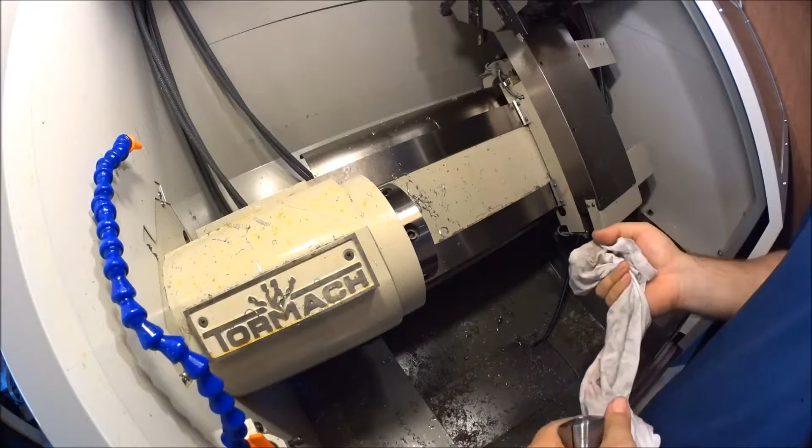Okay, so we're about ready to put the new collet in, but before I put the new collet in, I always take a rag and wipe out the seat, just so that if there's any chips or any kind of debris, it doesn't affect the accuracy or wear out unevenly. So just make sure that's clean, and make sure the collet's clean. Just slide this in, and we can just feel around. There's a pin that goes into this groove that keeps the alignment. So we just want to feel around until that pin slides into there.

And then on the back side we can screw that draw tube into the collet by rotating the opposite way. Sometimes it's a little bit tricky, it might not want to go right away. There it goes. Give it a little bit of a push. Now I can just screw this down until we get kind of close. There's not a lot of movement, so we know we're getting close. Okay.

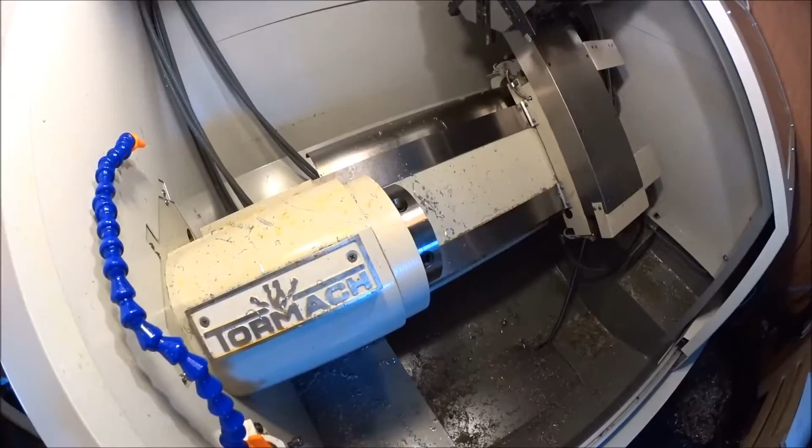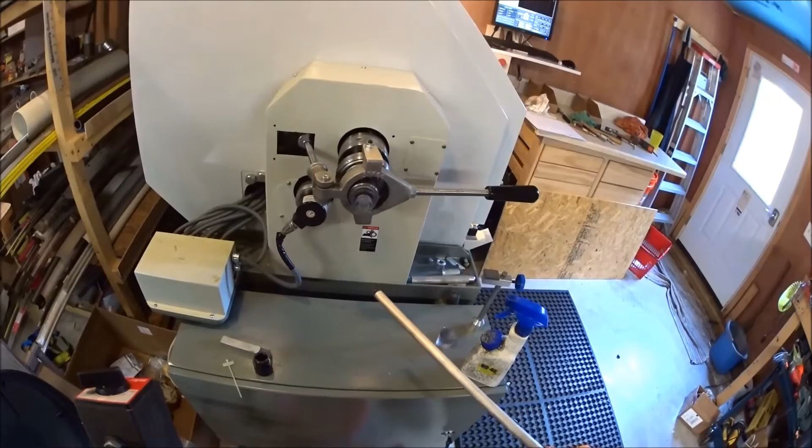Now I'm going to show you one of the little secrets that I found when I started. I found that when you put a rod this small into this machine and you start spinning it up, it has a tendency to whip really hard back and forth when it's a long bar. So I went ahead and made up one of these things here, and it's just like a bushing, so that it can plug into this draw tube and reduce the size of the hole that this thing can go through, and that will keep it from whipping back and forth too bad. That'll kind of keep it centered.

Once you get the part all the way in there, you can pretty much just take this out. It'll be too short at that point to whip enough to really be of any danger. So just pull this back out for a minute here. Set that down. Get this locked back in.

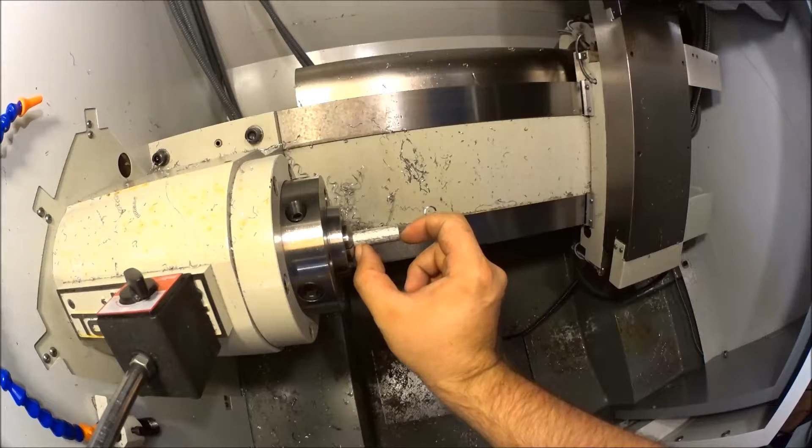Okay, so according to our drawing, this part is going to have a total length of 2 inches. So we want to make sure that this length is 2 inches plus some clearance room, so that whenever we go to cut it off, none of the tools will run into the chuck. So 2.5 inches sounds like a good place to start for me.

So I'll just take our handy little stop here, put it up against here, and slide it out until it touches, and that's going to be good enough. We'll actually give it a little bit more for this first one, so that we can face it off and set our length on all the tools that we're going to have to put in.

So I need to tighten this up a little bit until it locks properly. Give that a little bit more. Okay, so that's locked in good and tight there now. And we're ready to get on to setting up tools. So now I always up my jog speed to 100. I know where I'm going.

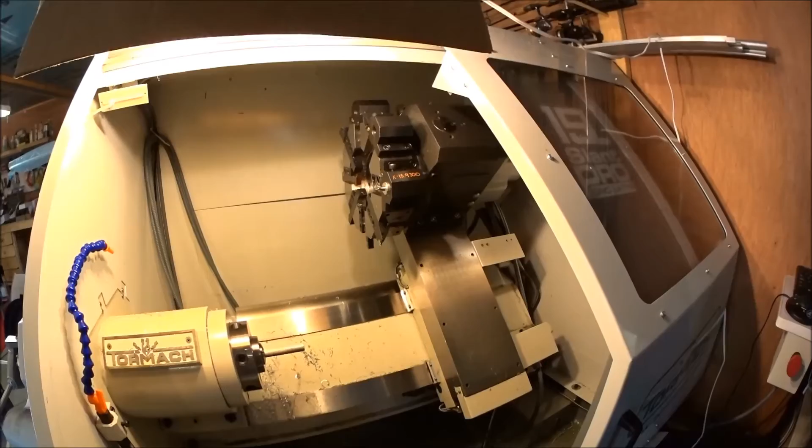So we're going to just come down here with tool number 5 that's selected right now. Let's change that to tool number 1. So we'll go T101. This is my master tool for length offsets and all that happy stuff. So we're going to come over here, come down, and we're just going to get kind of close for right now, and then we're going to input.

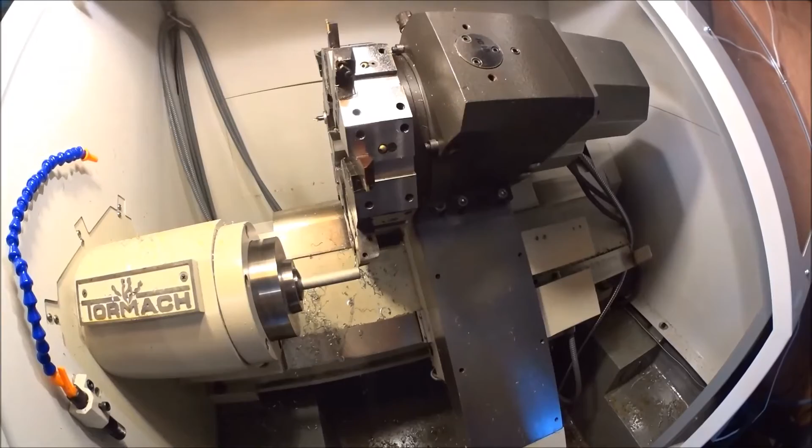Let's start out at 1000 RPM, hit enter, and we'll turn the spindle on. And now we're just going to move over until we kind of touch the end, and we can face it off a little bit. So you just want to take a couple thousandths so that we're cleaning up the end. And we just stop everything and tell it that this is our Z0.

Now, this was something that I learned the hard way. So the first thing I want to do after this is back off the end and go to my cutoff tool, which is going to be tool 202. I'll move to a safe X, and then I'm going to move until I'm at Z-2 and just give an eyeball check and make sure that everything's going to come out okay.

So that's close enough. And looking at everything, yeah, we're going to be fine. So that's a good Z0 for everything. So let's move back home. Alright, so that's the stock setup.

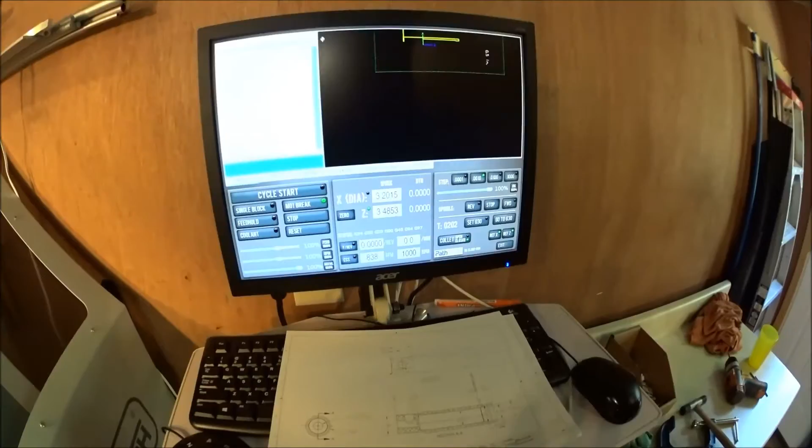Now, we still haven't programmed any kind of G-code yet, and this is going to be a multiple setup part. We don't have enough boring tools to make all the features on the inside, because what we're going to do is we're going to have to spot drill this. Then I'll probably drill it out with maybe a 1/4 inch drill with parabolic chip flutes.

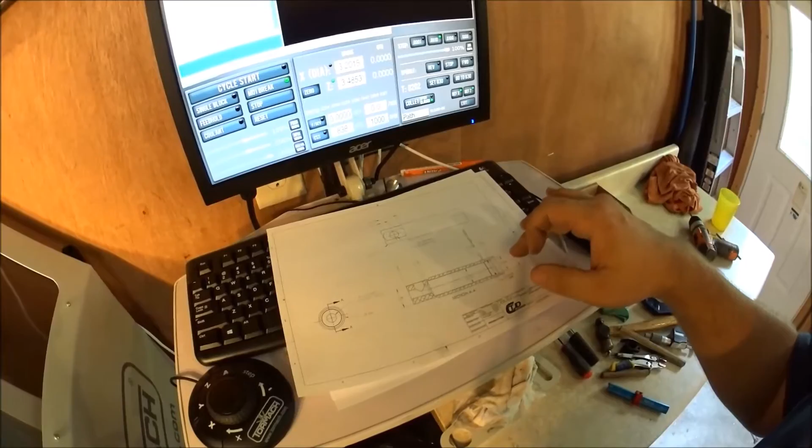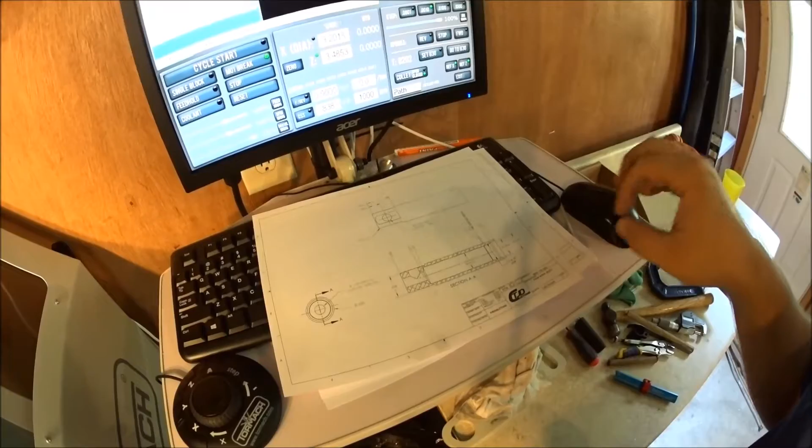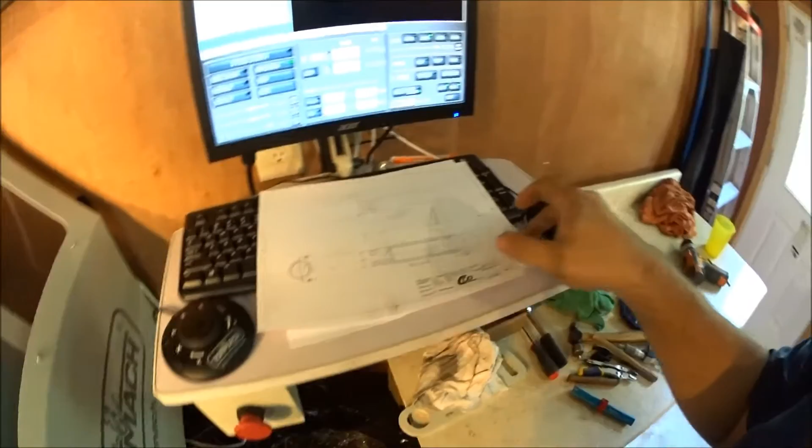Then the next thing we'll do is we'll take a smooth finish 3 flute carbide drill and drill it out to 3/8. But knowing what I know about the O-rings that I'm going to be putting in here, I'm going to want to ream this to a little bit above 3/8, to about 380. So we'll ream that out to 380, which I have a reamer for. But that's 3 boring tools, and let's jump over to tool 6. So T606.

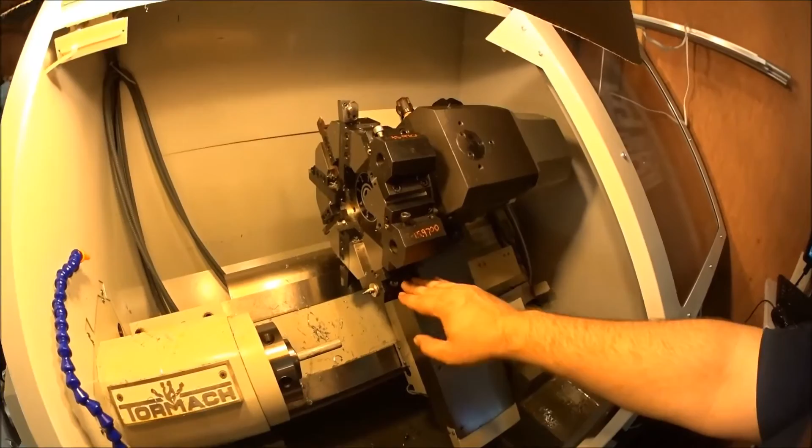So I only have a slot for 3 drilling or boring tools, and I'm not going to tear down the rest of these tools to do that. What I think I'm going to do is do the spot drill, rough drill, semi-finish drill operation on this setup, and turn the OD to 1/2 inch, and that'll be it for the first operation.

The second operation is where we'll do the reaming and the boring and the threading, because that'll be another set of 3 tools that I need. So with that in mind, we'll go ahead and get on writing the program to do that stuff.

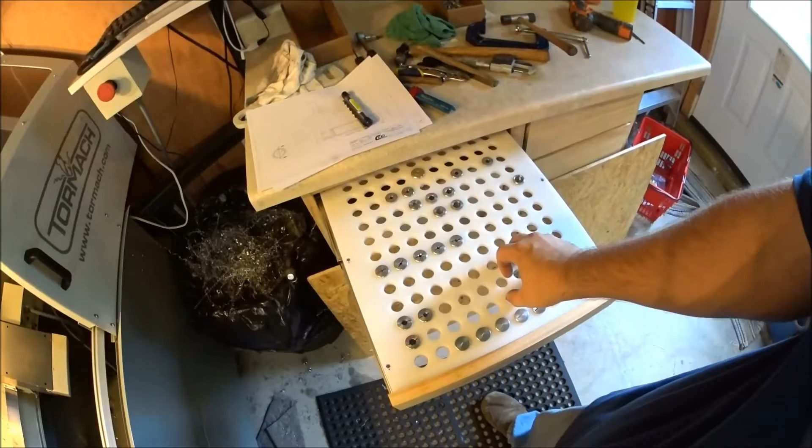Okay, so if you've seen a couple videos ago, I was talking about how I wanted to get this bench done. It's still not quite done, but it's done enough to start putting some of my tools in. So the short drawers here were specifically made to hold these drill bushings, and these are the blanks. This particular one is a blank to make things like this here.

And what these do is these go into the holes in the turret. These are 3/4 inch holes, and they are split so that whenever you clamp down on them with these pinch bolts, you clamp onto the tool and hold it concentric, and you can use it to drill. So it's a little bit more rigid than using a drill chuck, but not quite as versatile.

But I have plenty of these things here, and I don't want to have to use all the extra Z clearance. Whenever you put a drill chuck on here, your Z home position for your tool change would have to be a lot further back. So I want to save a little bit of time by not putting any kind of drill chuck on here and getting the tool as close to the same length as possible.

So okay, we got tool number 6 in. Tool number 6 is going to be our spotting drill, so that's already in there from the previous job. Tool number 7 is going to be our 1/4 inch drill. So we got that right here, and this is a parabolic drill, so that we don't have to worry as much about clearing chips. This can clear a lot of chips real good.

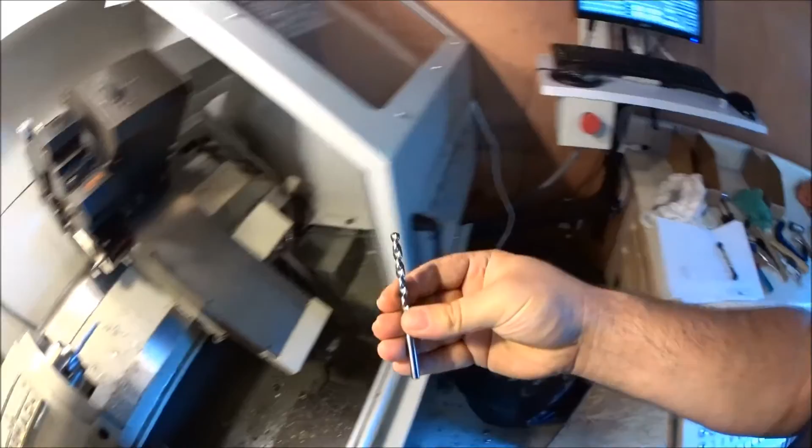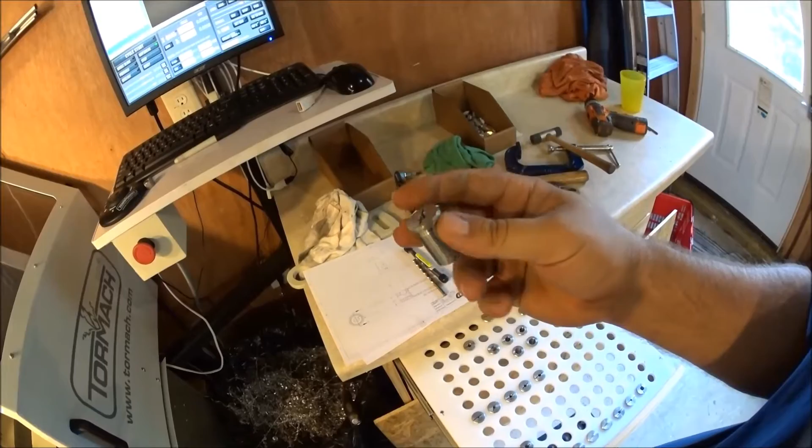So we need a 1/4 inch split collet here. These are the kind of collets that I actually make. This is one of the first programs that I made, and I actually like to split them this way as opposed to this way. This is a different style of splitting. I think that this holds them better because the point that you're trying to bend is further from the center.

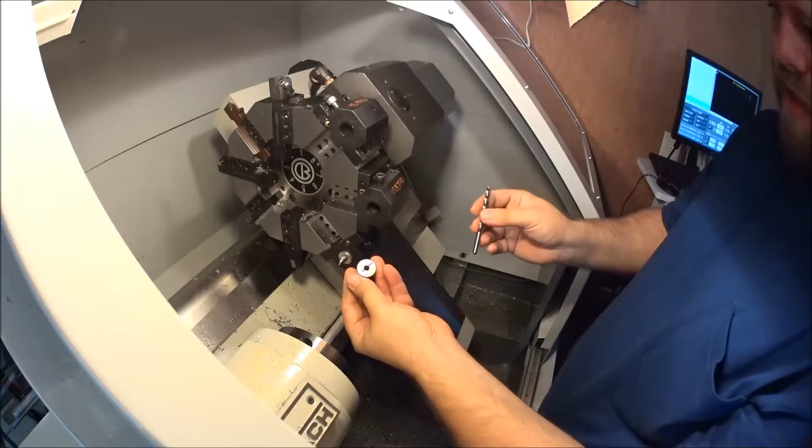Okay, so I'll put one of these things in, and we'll get started on that. So these are pretty easy to put in. You use the drill size that you want to have the hole be. Drill the hole so you know that it's going to be the right size. I don't bore these out or anything like that. I just use a drill, and slide that in there, and it registers up against the surface.

And then I lose my wrench. Oh, here it is. So make sure this is going to be tightening, and then I can just tighten this down. There it goes, and that's it. So that's nice and tight in the little split collet. And what I'm going to do now is move this back, go to tool 7.

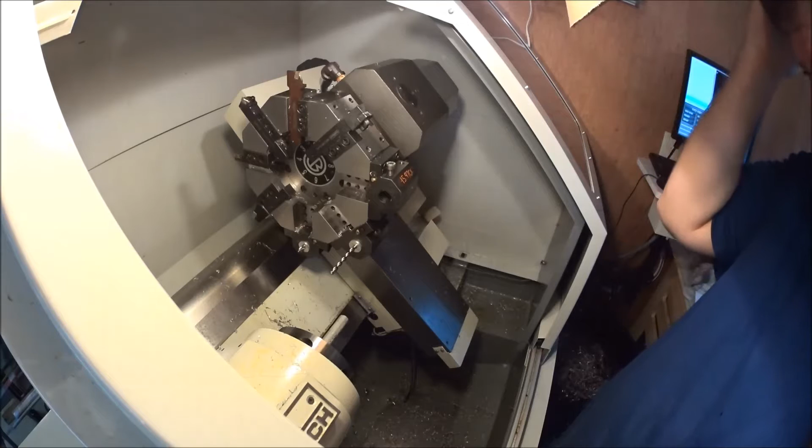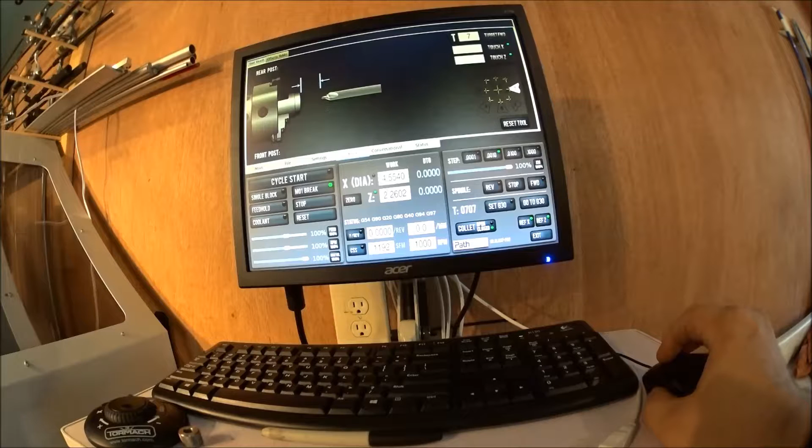You can probably see it's kind of a little bit washed out, but I know that the center of this hole was bored whenever it was at X minus 15.97 from the home position. I'm going to jump you over here to the computer and I can show you what's going on. Okay, so we got tool 7 selected over on the machine, and we want to make the offset for this thing here. It's already set to tool number 7, which is a drill. It's shown as a center drill, but it works for any drill.

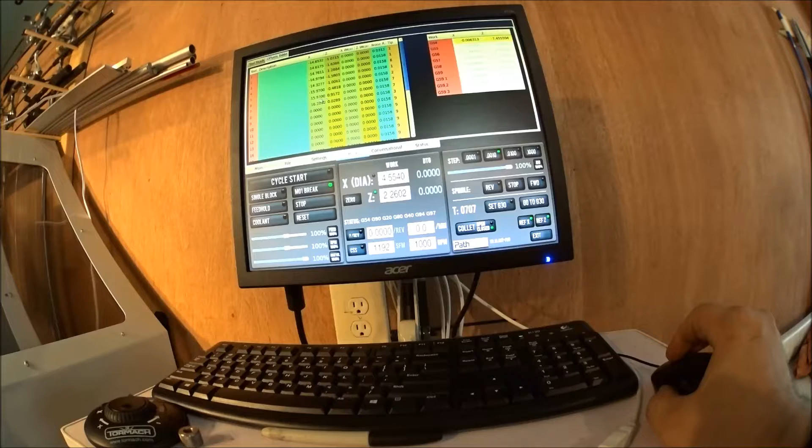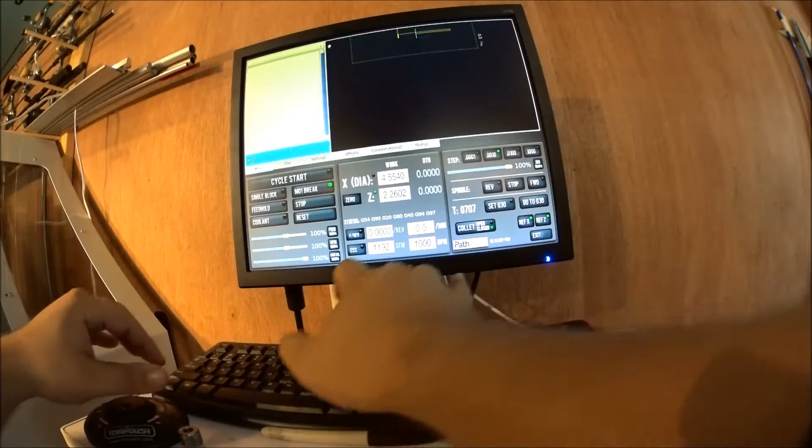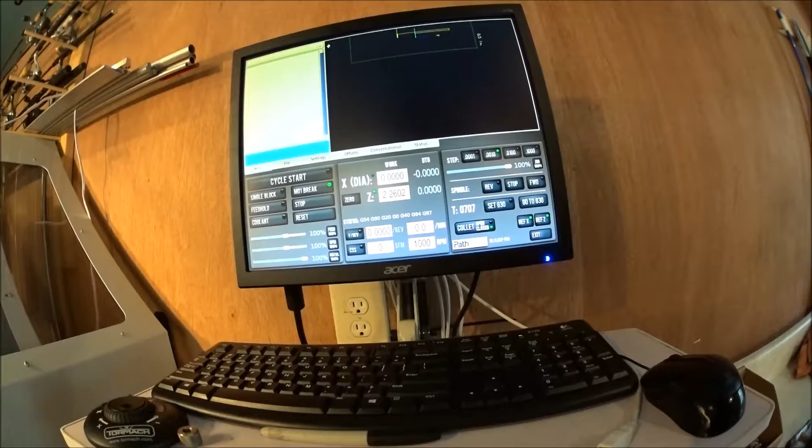And if we go to our offsets table, tool number 7, you can see the X is at minus 15.97, just like it's written on the holder there. So if I tell this thing to go to X0, that should center it on the part, and it did. So far so good. And then I just take this little piece of Starrett shim stock. It's 11 thousandths thick, and I will just step over until I can touch off on the end of the part, and that way we'll know where we're at.

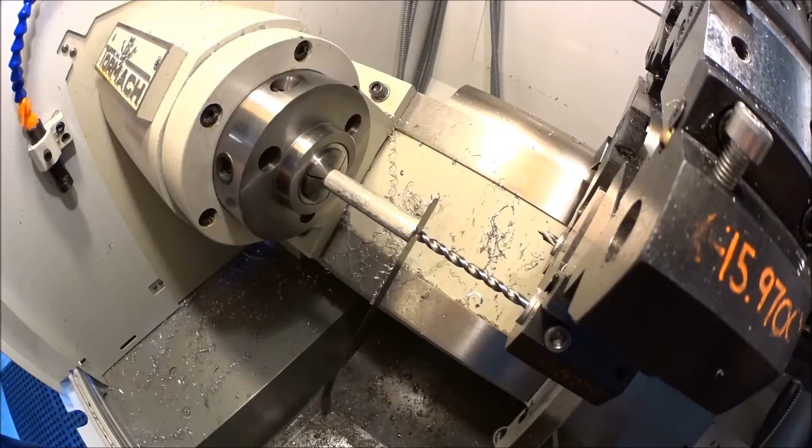Okay, so we got our 11 thousandths shim stock here, and we're just going to run over until we get kind of close. Then we're going to step in 1,000th increments, and we're just going to go until we start to feel it. Yep, there we go. See, it's touching, a gentle push or pull keeps the stock right there, and then we can come over here and go to our touch Z and say 0.011. Touch Z, and our tool is set.

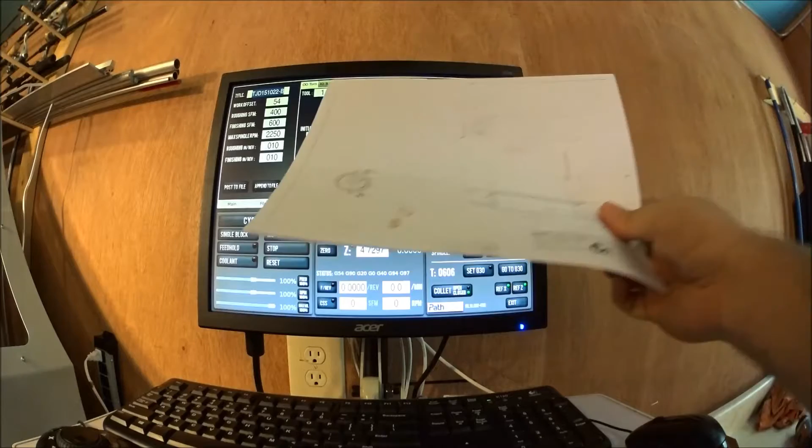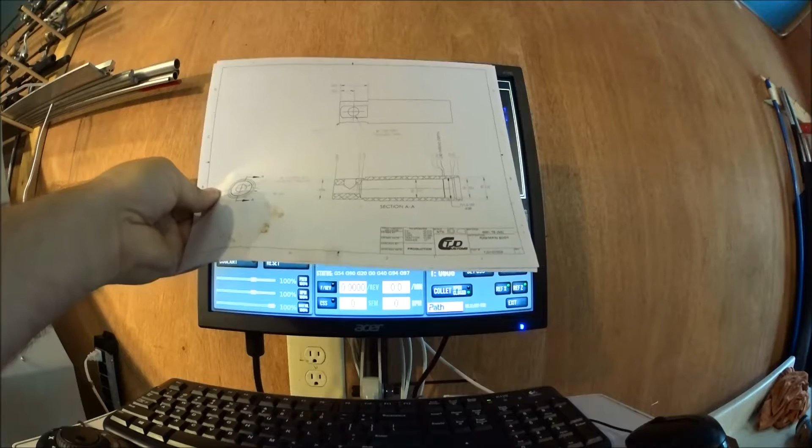Okay, we're ready to do some programming. Now, because this is sticking out so far, I'm a little bit concerned about getting a taper because of the tool pressure when we're cutting from here to here. So I'm going to cut the outside profile first, because that's when the part is going to be the most rigid. And on the last pass, we're actually going to do a little bit of handwriting of G-code, so that if there is any deflection from here to here, we can dial that out by making this cut at a taper, so that we can dial that taper right out of the part.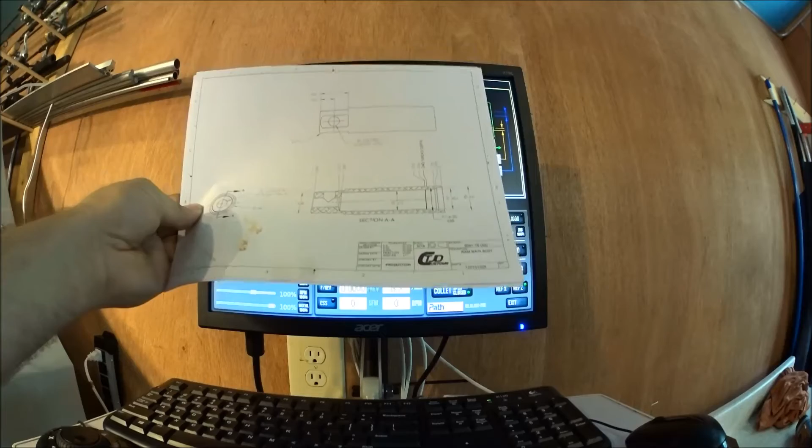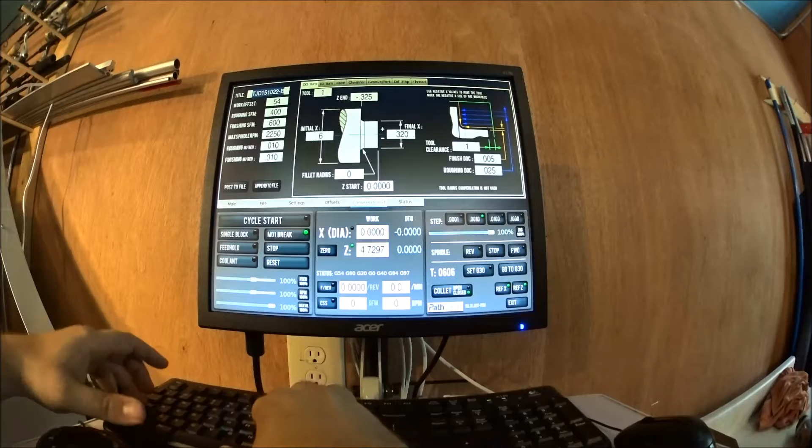So we're going to start out with the Wizards first, and the first thing we're going to do is rename this to the part that we're making. It's going to be TJD 1024, and this is the first operation, so I always call it A.

Now right now the max spindle RPM is going to be 2,250, and that's going to be too fast, because if you remember earlier in the video, we were talking about how the stock sticking out the back end of the spindle can whip. That's a little bit too fast for my comfort, so we're going to bring it down to 1,500 RPM, and that's probably even going to be a little bit much. We'll just do 1,000 RPM. We'll just be safe on the first couple go-arounds, and we can always ramp that up if we need to.

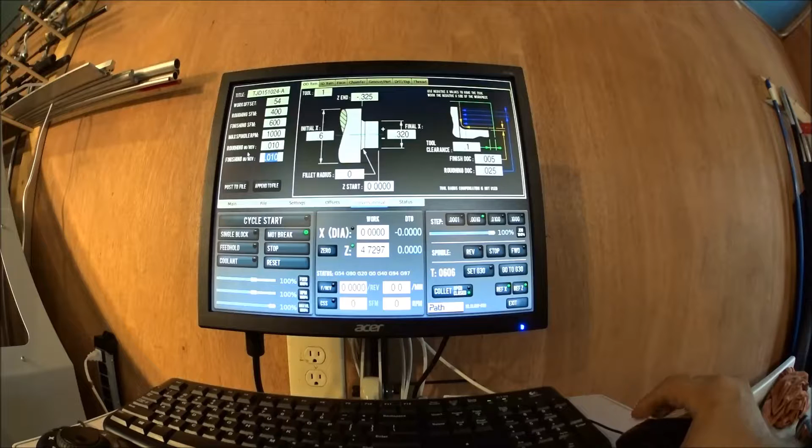So we're going to change our finishing surface speed, or finishing inches per rev, down to about 5. 5 is going to produce a good surface finish, I know that. 3 is something that I do whenever I'm cutting threads and I need it to be ultimate. 10 is going to be my roughing speed. This probably could be faster, but the higher this goes, the more tool pressure and the more likelihood that you're going to get deflection as it's getting cut. So I'm just going to leave that at 10 for now. That's a good safe number.

So we want our final diameter to be 0.500, and our initial diameter is going to be 0.5625. Our Z end is going to be minus 2. We're going to go a little bit past so that we make sure that we cover everything with this surface finish. So that's going to be 2.05. Go 50 thousandths past. That'll be enough. And we're going to post to file, and this is going to be a paintball part. This is a WGP RAM, and we'll leave that right there.

Now, the first thing, we know that we want to dial in that last pass. So we're going to go straight into edit G-code, and this finish pass, we're actually going to take most of this stuff out. When this finish pass starts, we are going to be at coordinates X 0.7625, Z 0.1. Okay, so we're going to be above the part and outside of it. So first thing we're going to do is G00 X 0.500, and we're going to put a comment in here, adjust for end deflection.

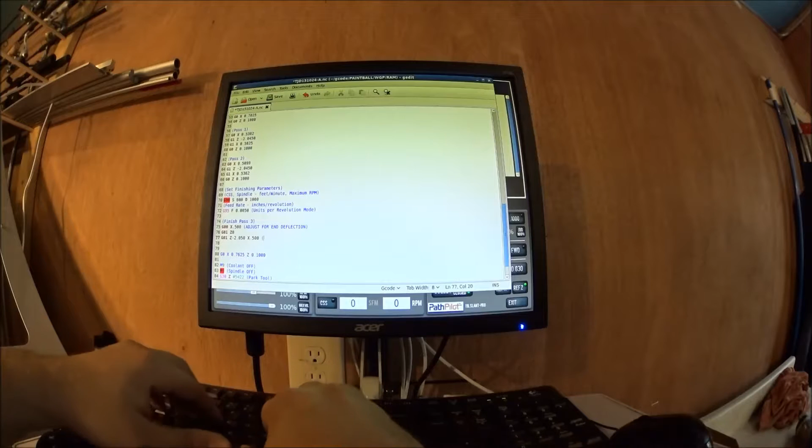So we're adjusting for end deflection here, and this will be the final dimension, which I know is going to be good because we're so much closer to the chuck, and we're up near more stock, so it's going to be more rigid. So I think this is going to be fine, but we'll just put in here end taper. And then we're going to feed out of the part so that we get a nice shoulder. So we're going to go G01 X 0.6. So now we're outside of the part, but we don't want to go anywhere crazy just yet.

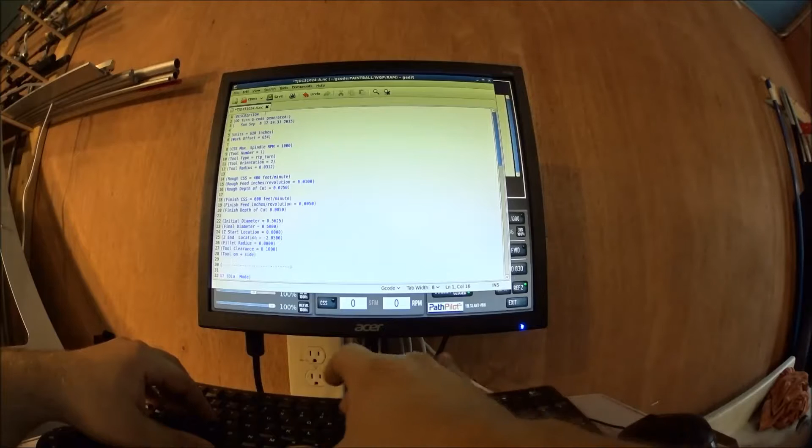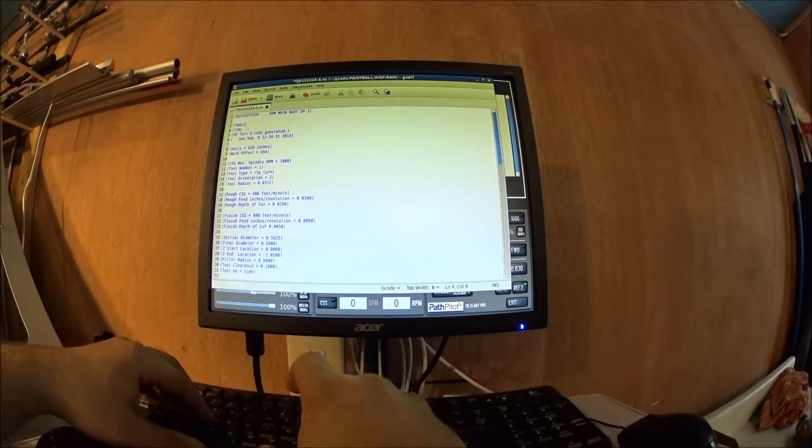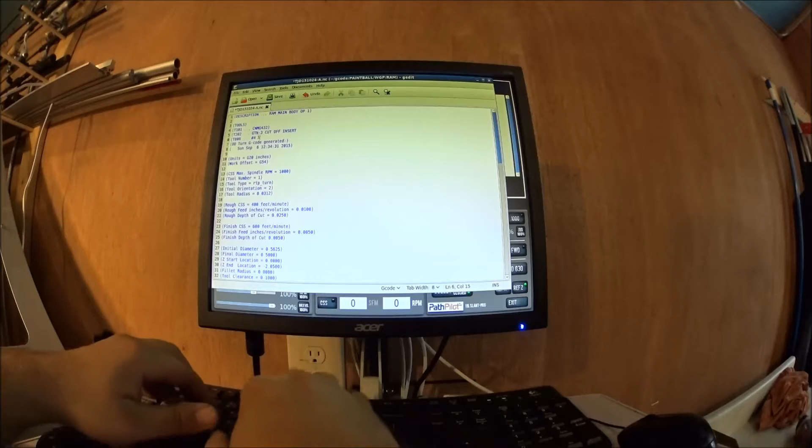And the tools that we're going to be using are going to be T101, and that is going to be a CNMG 432. And tool number 2, tool 202, is going to be a GTN-3 cutoff insert. And that's all we're going to need for the OD tools. Then we're going to go up to T606. This is going to be a number 4 spot drill, center drill. Tool number 707 is going to be a 1/4 inch parabolic drill.

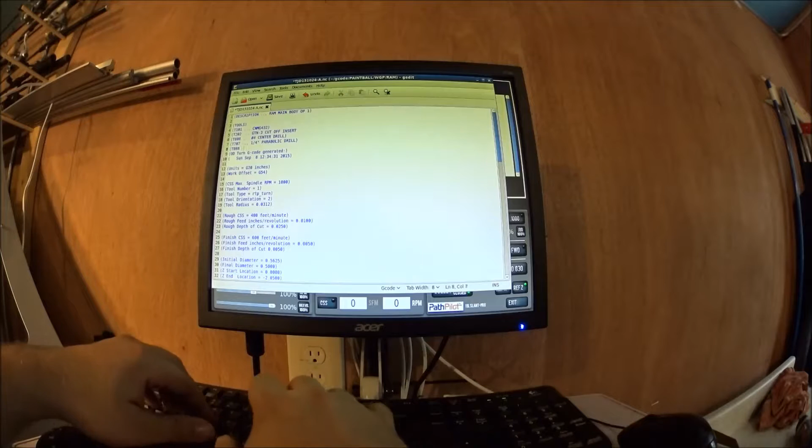And tool number 808 is going to be a 3/8 carbide 3 flute smooth drill. Okay, so that's what we got for the first step here. And actually, we probably want to do a roughing, a surface of this thing to length first.

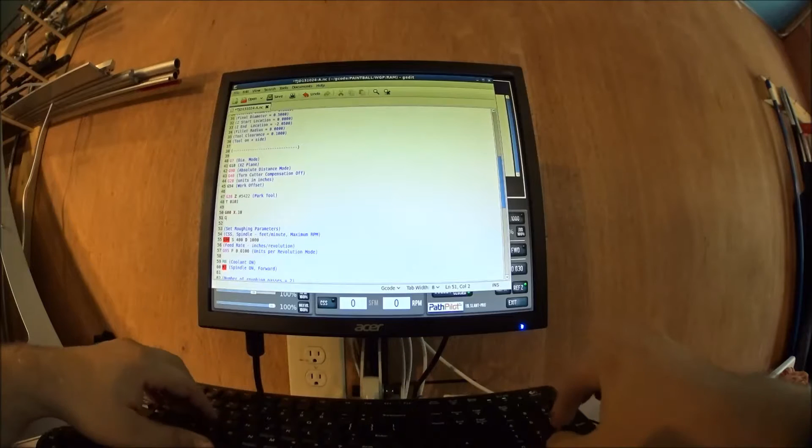So, okay, we're going to change to tool 101, and then we are going to G00 X0, or actually X 0.10, and then we are going to G00 Z.030. And this is going to run before the part gets indexed forward. So what this is going to do is move to 30 thousandths in front of where the 0 is now, and stop and wait for me to index the stock out and lock it in place. So we're going to M01. So that's going to be wait, index stock.

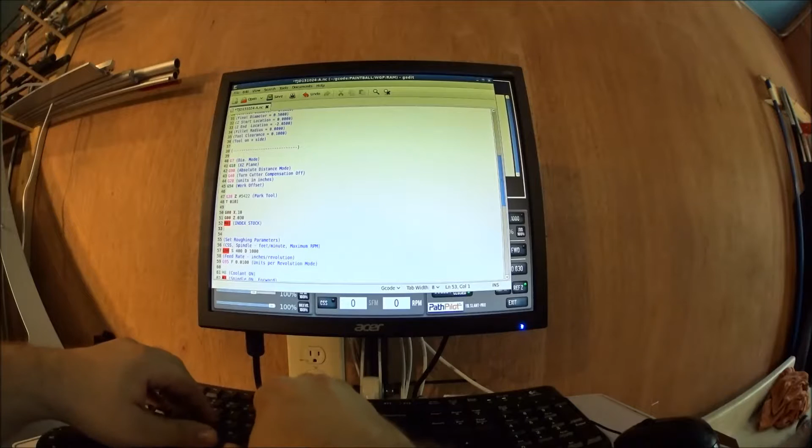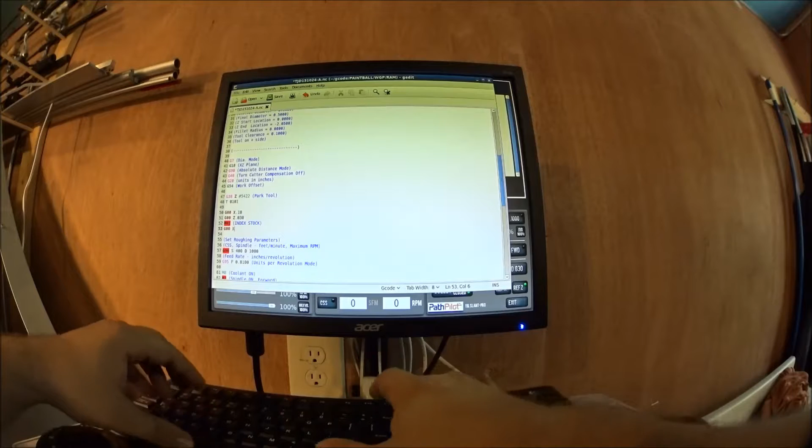So we're going to index the stock there, and then we are going to pull back away from the part before we start the spindle and start the program. So we're going to G00 Z.1, G00 X.6.

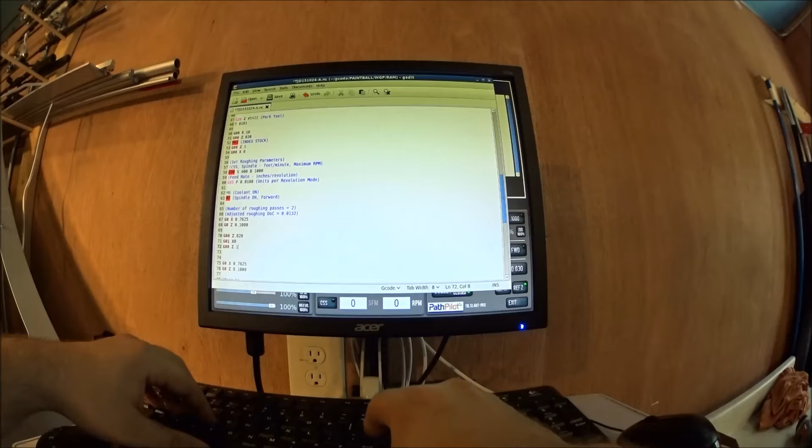And actually, it's not hard to write a facing code, so what I'm going to do is I'm just going to add the facing code in right here. So we're going to G00 Z0.020, so that's going to be a 10 thousandths facing cut, and G01 X0, and then we're going to move out to G00 Z.1, and we know that there's going to be nothing there, but we'll do it in 2 steps.

G00 X.6. So now we can just copy this part here and paste it in below, and all we have to do is change this number to 10, and one more time to 05. And then we reduce the depth of the pass there just so that we make sure we get a good finish.

But we're also going to take this G95 and copy this right above here, because we want this to be a finish pass. So we'll take this 0.005, so 5 thousandths per revolution. But we want to bring it back to 10 thousandths for roughing the OD. So we'll just copy this again, and before we start the next part, we'll change this back to 10. And we should be good to go.

So that should be our facing and our outside profile. And this finish pass is going to let us adjust for any deflection. So let's save that. Yes, we want to reload. Okay, so here we go. Here's a good thing. Near line 6 of this part, there's an unclosed comment. Looks like probably up in here I forgot to close a comment, which right there it is. So close that, save it out, and we shouldn't get an error now unless I made another error.

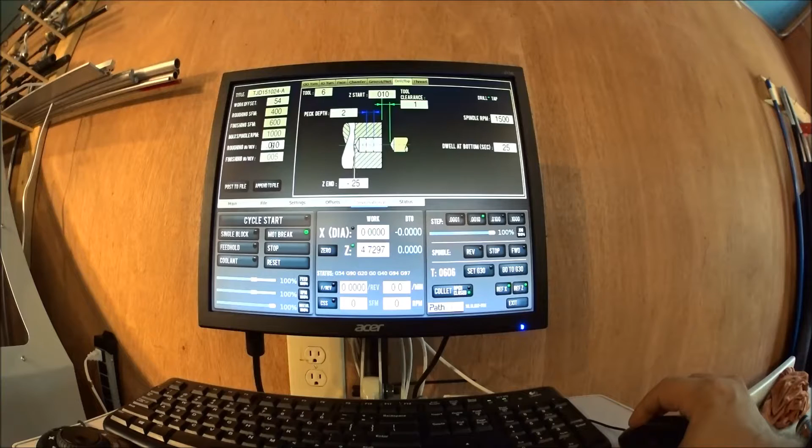Okay, that's it. So you see the surfacing cuts, the OD profile cuts, and now we're going to move on to the drilling. So drilling's pretty easy here. We won't have to do too much craziness on this, but we do know we're going to go minus 0.25 with tool number 6, so that's our spotting drill. We'll start at 10 thousandths above, and let's slow down our feed for this. We want to go 5 thousandths per revolution. And we're going to keep our spindle speed at 1,000.

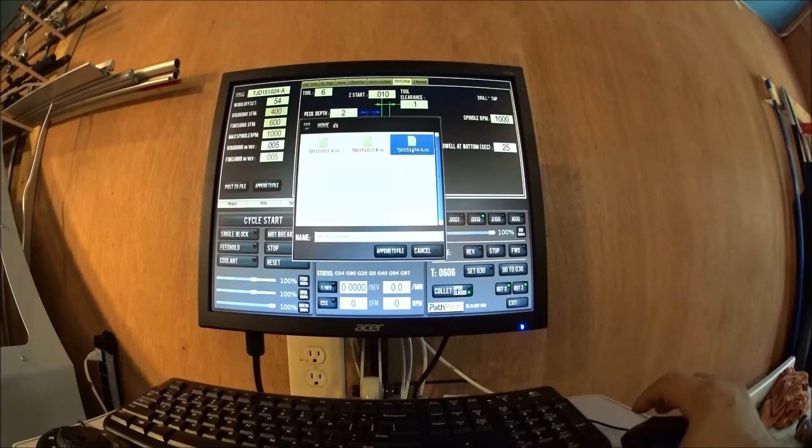And we're going to append this to the file this time. Append to file, and you can see that now we have end of OD turn, drilling G code generated, and that's our drilling G code for our spot drill. Okay, where was I? Okay, so we did the spot drill, and now we're going to do tool 7.

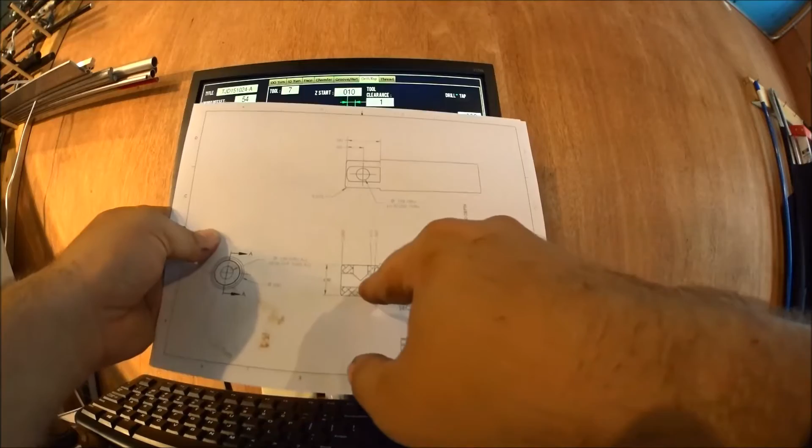So that's our 1/4 inch roughing drill, and we're going to go to a little bit less than what we want the drill depth to be for this finished drill. So the finished drill is going to be 1.610, so we'll do 1.6. And we want our peck depth to be a lot shallower than that. We're going to clear it every 1 diameter, or let's do it every half a diameter just to be safe, so 0.125. And again, we'll leave our roughing inches per rev, 5 thousandths, still 1,000 RPM, and we'll append that to the file.

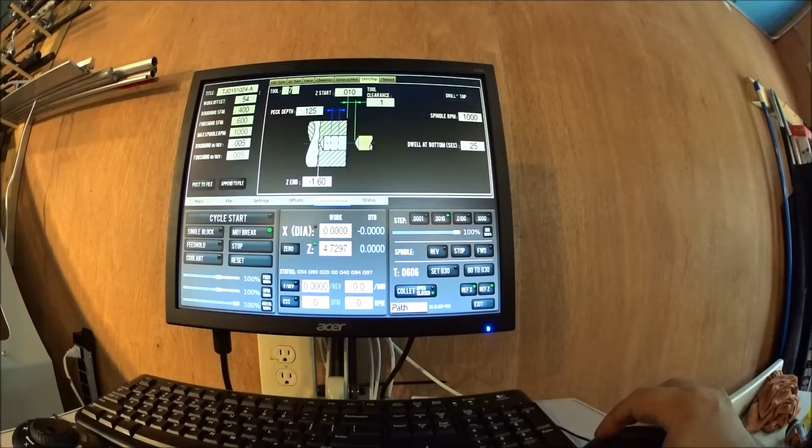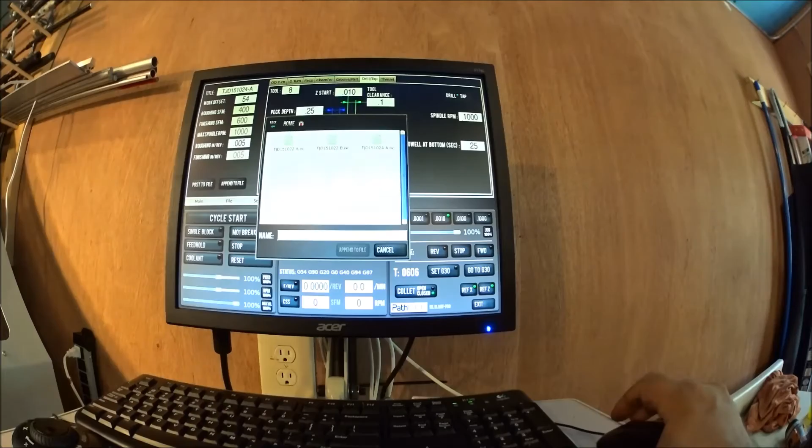And last but not least will be our number 8, and this will be 1.610, and we'll bring this down to 0.25. So because it's already roughed out, we can probably go a little bit deeper than that even, but we'll go ahead and just let that start out there, and if we need to change it, we can change it. So we'll append that to the file, and we'll just look at the G code here real quick. Descriptions, right, okay, all that's right.

Okay, we got our taper adjustment, our spot drill, rough drill, finish drill, semi-finish drill, I guess, because we're going to ream this afterwards. So we're going to save that, and everything looks good. That looks like a good place to start.

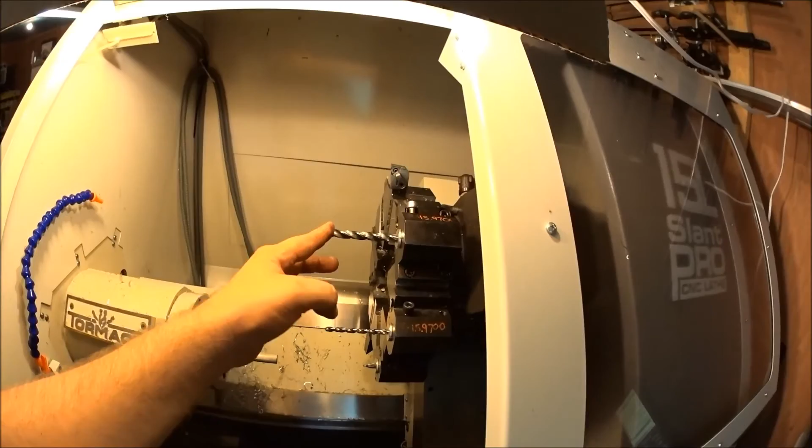So now we want to set our G30, which is our tool change position. So what we want to do is look at the lengths of all the tools here, and we say that tool number 8 probably sticks out the furthest, and so we want to get to tool 808 and then just make sure that we're, say, an inch beyond, Z+1 beyond this, so that whenever we change tools, we know that we'll always clear. So we'll go T808.

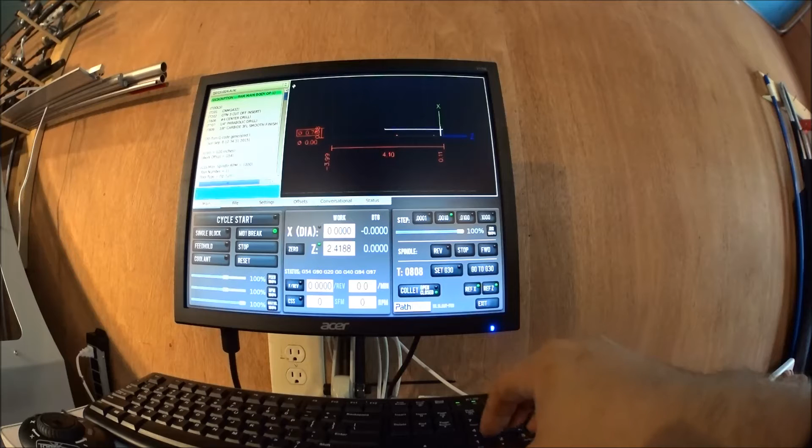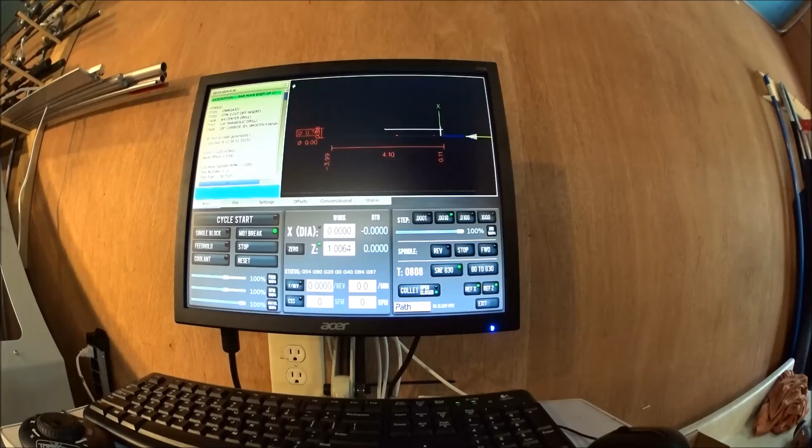And you see right now it says Z2.4, so we're going to take our Z and we'll just make it, that's close enough. We'll set our G30 there. Okay, so I already adjusted the coolant and everything like that, so we know that the coolant's going to get on the tool where it needs to be for all the tools.

So we're going to close this thing up, and hold on a second here. I'll be right back after I clean the window. We'll close this up and give it a run and see what happens. Okay, so we got the window cleaned off. We got everything set up. We're ready to try our very first run.

Hopefully there's not too much glare for you guys. I had to keep the window closed because it's going to make a mess whenever the coolant starts. But everything's ready. Wish us luck. I hope we don't crash anything. So this is our very first. It's waiting for me to index the stock forward, so we're going to do that.

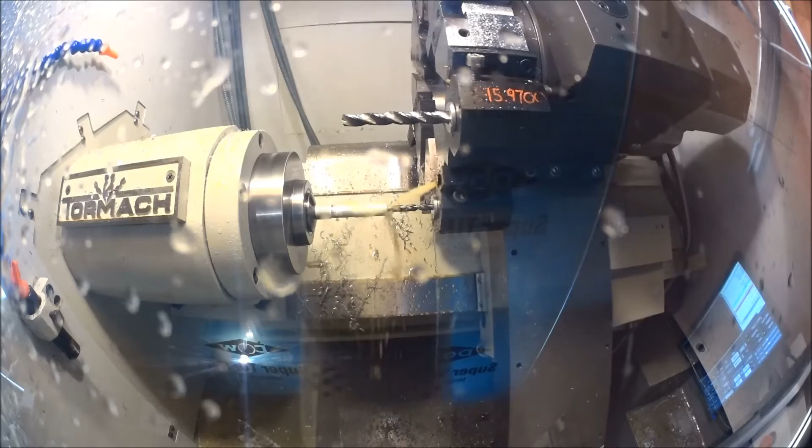And again, because we have clearance on this one here, I'm not too concerned about it. Plus it's carbide, so it should stay pretty straight. I feel like the chips that are coming out of there look pretty good. They're not too thin, not too thick. So that's probably a good feed rate for both of these drills.

And now that's actually the end of the program, because we didn't want to cut this off until we were sure that it was going to be good. So everything looks good, so we're going to go back over to the computer, we're going to tweak some of those feed rates and add the cutoff program. Okay, so that was pretty successful. So now all we got to do is cut the part off, and the first operation will be done.

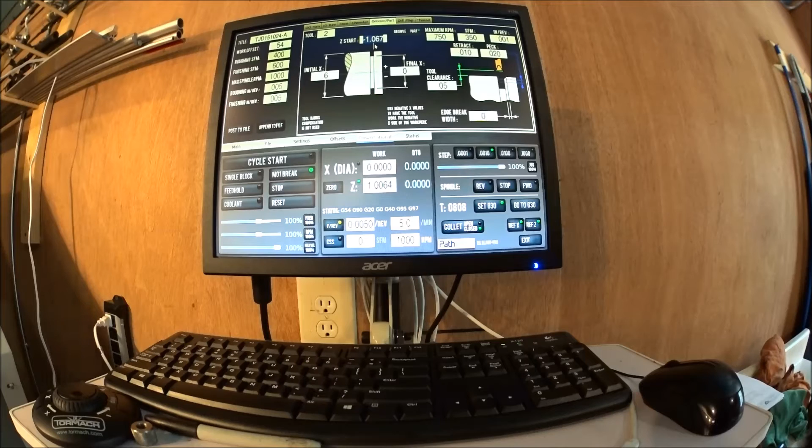So we're going to go to groove part here, and we're going to go to part, and we're going to give our Z dimension at minus 2.005, and that 5/1000 is so that on the next step we can just clean that up and make the end look good. Again, we're going to go about 1,000 RPM, and our inches per rev is only going to be 1 thousandth.

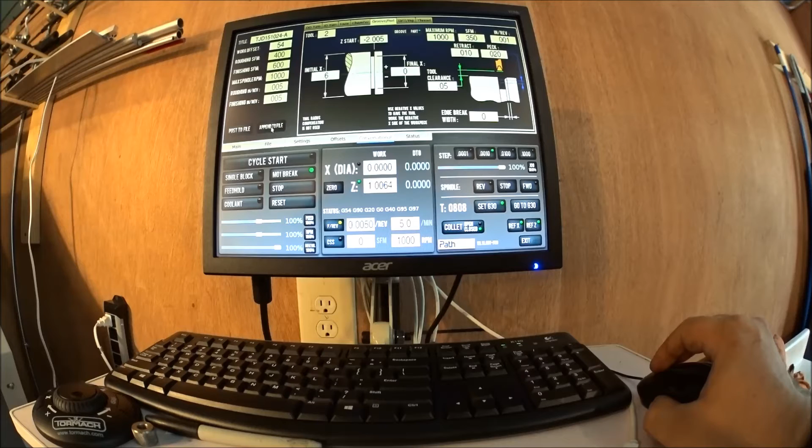But since this is the last part, and this is one of the more fragile tools, the GTN3 insert, now is not the time to make up any time. So we'll just let this go, and let it take as long as it's going to take. It's still going to be pretty quick. But okay, so now we're ready to append this to the file. Append to file. We're good to go. So now we have a cutoff.

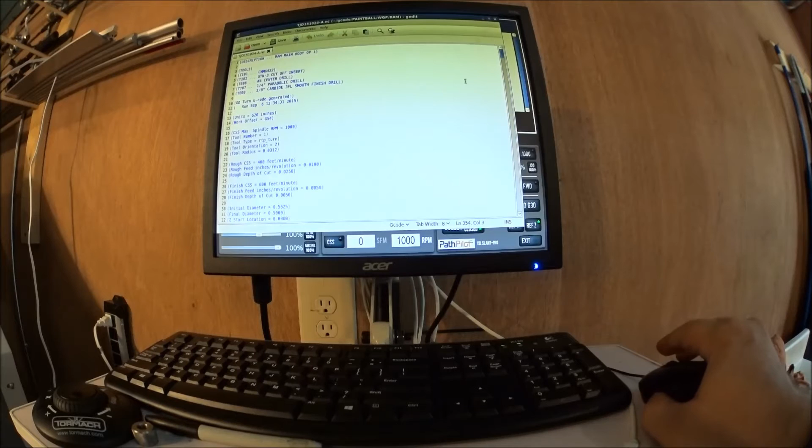Back here it's shown, and we're going to go into the file, and remember we mentioned earlier that we're probably wasting time on this front section, so we're going to leave the facing at 10 thousandths per revolution and the finish at 5, but we're going to up the actual roughing to 15 thousandths per revolution, and we're actually going to leave this still at 5. So our finish depth on this guy here was pretty deep, so let's just change it to 0.200.

Actually, that's the dwell, 250. We'll leave that quarter of a second dwell at the bottom to clean everything up, but we'll only go 200 deep on the spot drill, the center drill. Drilling G-code, that was okay, I think.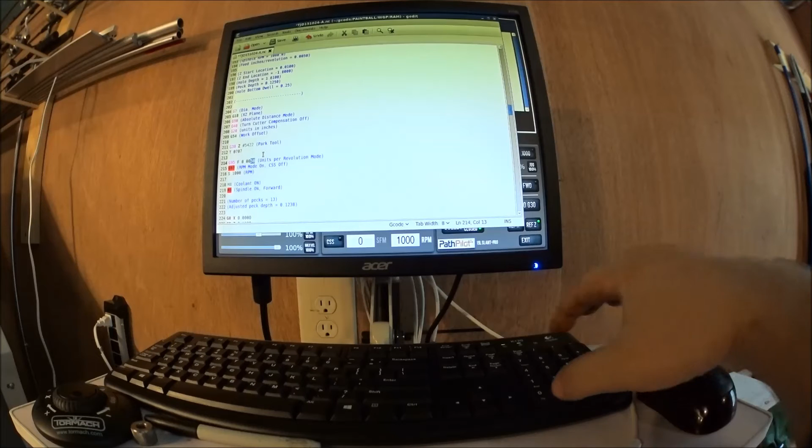But since it's the roughing pass, and I have no problem with the parabolic, let's go up a little bit faster. And again, we can go a little bit faster on the other drill too. That'll get us where we need to be. So let's go ahead and save that. Close it out, reload. So you can see this was 3 minutes and 15 seconds to do that.

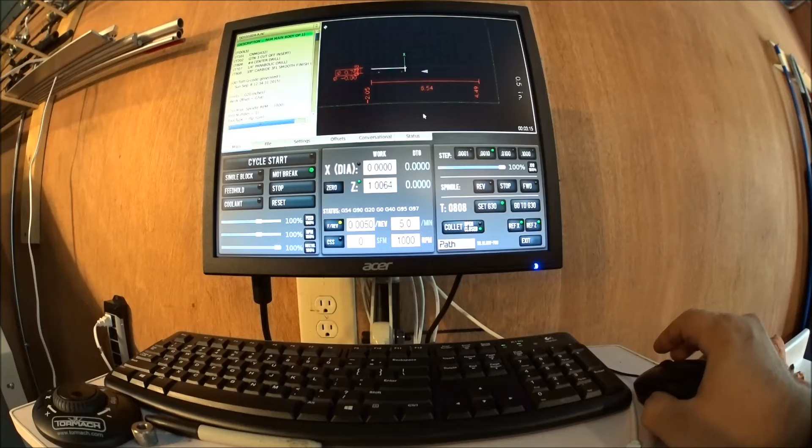We're not going to make you watch 3 minutes and 15 seconds of mostly cutting air. So I'm going to go ahead and finish this one off, and we'll start you fresh on a new one after this gets cut off, and you can see the whole program start to finish.

Okay guys, so the prototype part there, the very first part, just came off the lathe. It looks pretty good. I'll show you a picture of it here towards the end. But all I did was pick the part out and clean the window, so you can see how this program is going to run now. So you see the stock is pretty far back, and everything's closed. So all right, we're going to hit cycle start, and we can watch the whole thing.

So this is where we index the stock forward. We can just push it in from the back till it touches. We could feel that on the other side, and then lock the collet, and away we go. See how much faster that 15 thou per revolution is than the 10 thou. It's only 5 thousandths per revolution, but it really makes a difference.

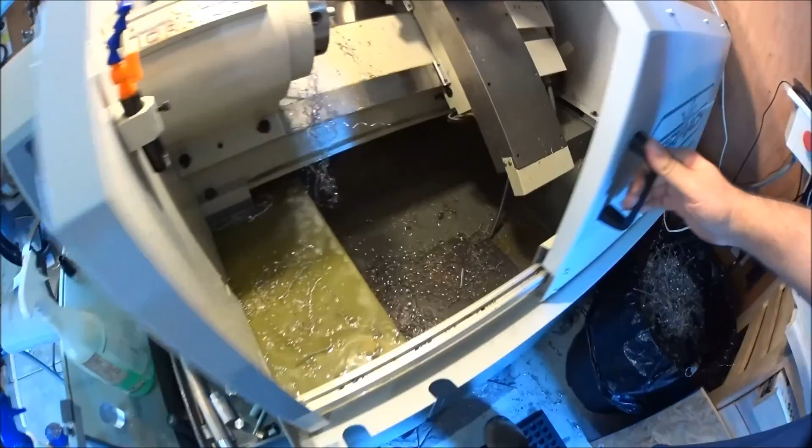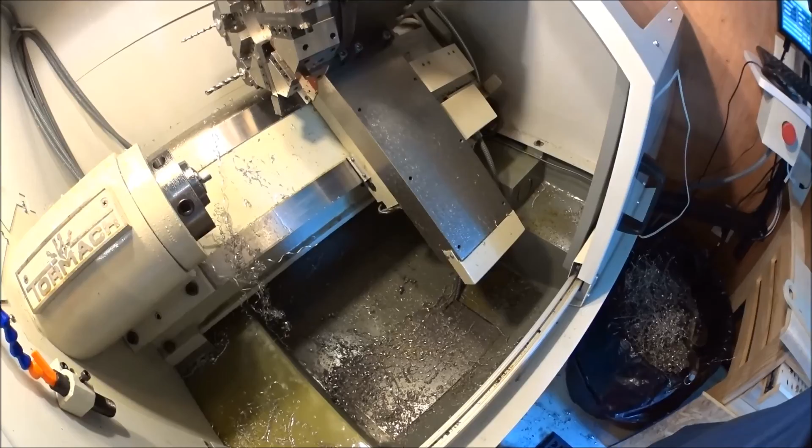So there we go, part dropped off down the bottom. Goes back to home. We can pull this part out now. Still got some coolant on it, but give us a second here and we'll take a measurement. Okay guys, we're going to take a quick measurement on the ends of this part here to see if we're within spec. Moment of truth.

0.5026. It's a little bit big. How about on this end? 0.5024. Okay, so again we're within 2 tenths of being perfectly straight, so there's only a 2 tenths taper along the length, which is good. So I'm just going to go in and reset the X position again on tool number 1, just to try to get a little bit closer, but 2 tenths isn't going to stop us. That's still a good part.

Alright guys, hope you enjoyed watching that. This is a part from nothing to finish, and I think we got at least 3 or 4 more setups for this thing, so maybe I'll just take everybody along for the ride on this one, and you can see how this entire part gets made and see all the things that have to go into just making a little tube with some threads in it.